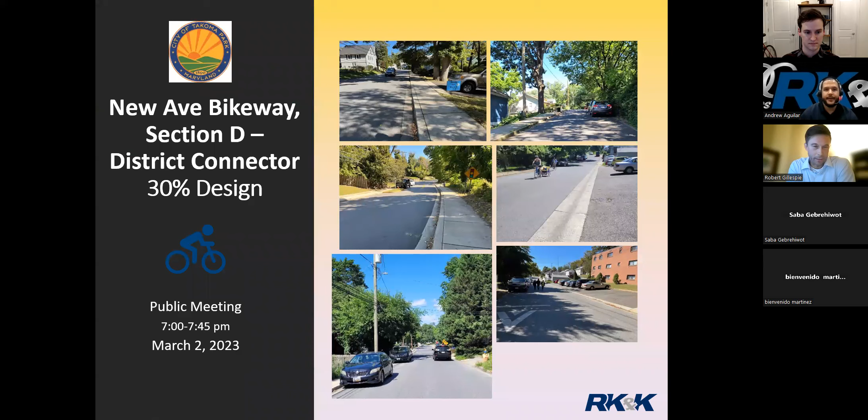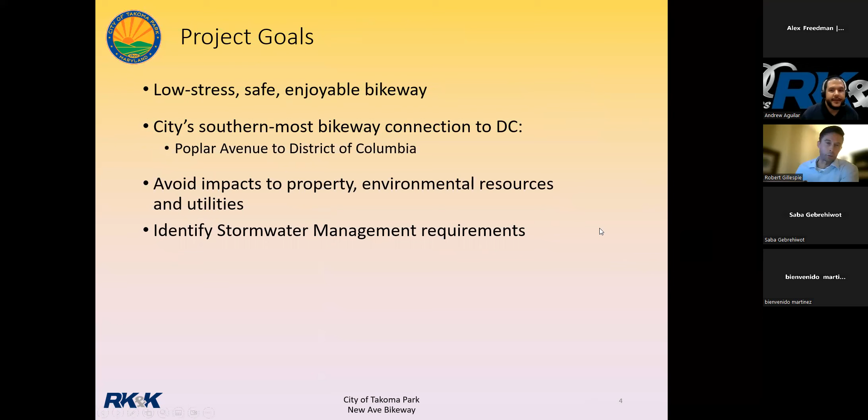So preliminary design, as Alex mentioned, is funded through an MWCOG Transportation Land Use Connections Grant. And the project goals are development of a low stress, safe and enjoyable bikeway. Section D would complete the city's southernmost bikeway connection to DC. It would implement the improvements while avoiding impacts to property, environmental resources, and utilities. We would also identify stormwater management requirements associated with the improvements.

Our 30% design approach is to utilize low-speed, low-volume neighborhood streets. And our key facility types for this section of the bikeway include sharrows or shared lanes with appropriate pavement markings and bike route and wayfinding signs. We're also proposing shared use path where city right-of-way is available.

So city planning and public works staff, along with RK&K, conducted site visits to evaluate two potential routes. And we selected a preferred route for survey and engineering, preliminary engineering. Project stakeholders include City of Takoma Park, the community, of course, Montgomery Planning, and utility owners.

As Alex had mentioned, as a frame of reference, the design team is completing construction documents for both the New Ave Bikeway sections A and B. That extends along the southbound side of New Hampshire Avenue from Holton Lane south to Poplar Avenue, about 1.2 miles for sections A and B. Tonight we're talking about section D, and those limits extend for approximately a half mile from Poplar Avenue to the DC line, where it connects to Kansas Avenue Northeast, where it would connect to existing on-street bike lanes into DC.

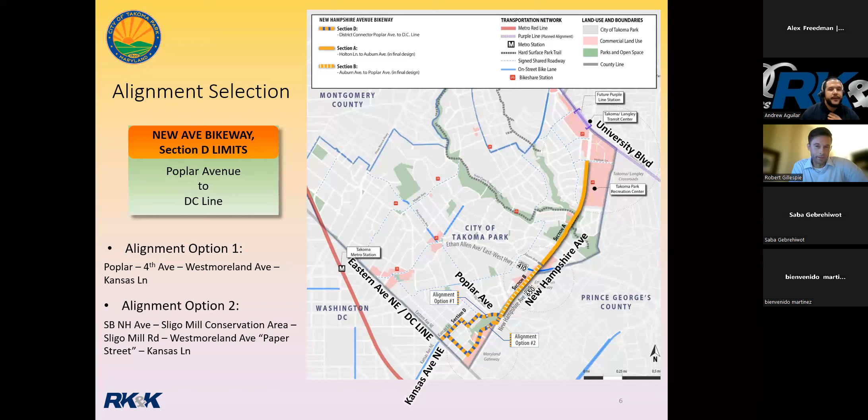Now, alignment 2 requires impacts to the Takoma Branch, Stream Valley, and the Sligo Mill Conservation Area. And it would also require narrowing of southbound Maryland 650 travel lanes just to implement an 8-foot wide shared use path with a 1 to 2 foot buffer for about 350 feet, which would require costly retaining walls and utility relocations. For these reasons, the design team selected alignment 1 for preliminary design.

The good news is we're not proposing any impacts to right-of-way or street parking on the draft plans for Section D. There are 2 utility pole impacts that we identified that would need to be relocated to install an effective shared use path - that's on Poplar Avenue and a wider sidewalk refuge for the school bus stop at the southwest corner of Westmoreland Avenue and Kansas Lane. We'll get into those details. I'm going to have Andrew drive us through the plans here shortly and spell those locations out.

To quickly summarize our steps completed and where we're headed: the design team performed field visits to review a selected preferred alignment for the preliminary design. A public informational field walk, Alex led that with the community last December. Comments were collected and considered for preparation of these 30% draft plans. We'll collect additional community comments received tonight and subsequent to this meeting for consideration in finalizing the 30% design. Our 30% design scope will conclude with a presentation to City Council in May.

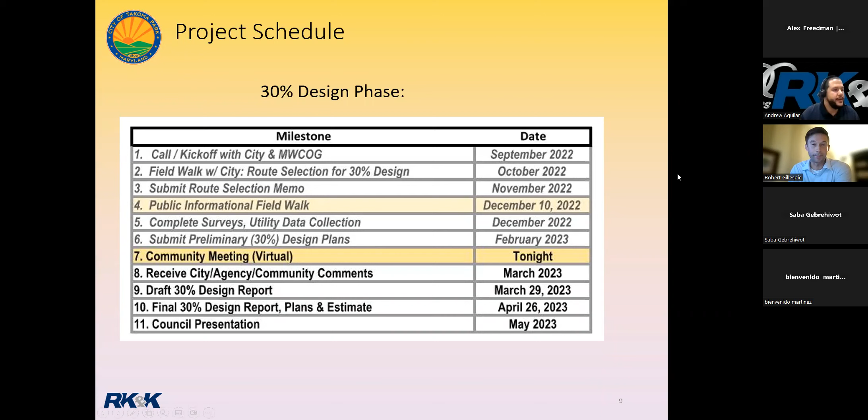To reiterate those next steps: we're going to collect comments from the community this evening, and subsequent to the meeting there'll be opportunities to provide your comments, as this will be recorded. Then we'll compile those, consider them with the city and other stakeholders, and we'll finalize the 30% design and conclude with a presentation to City Council.

Additional funding will also be pursued by the city to complete semi-final and final designs, which may include the MDOT Bikeways program, similar to what the city secured for sections A and B. So I'd like to turn it over now to Andrew to walk us through the 30% plans, and then we'll conclude with Q&A.

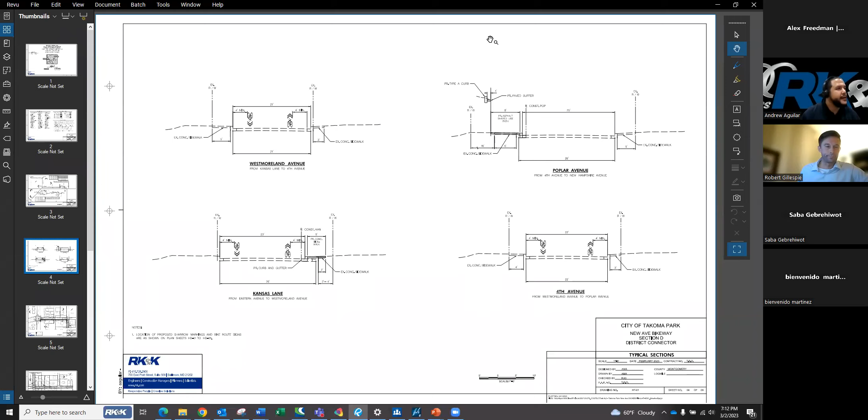Good evening, Takoma community. I'm excited to show you all the plans. I'll be focusing on showing everything in plan view and giving you an idea from block to block what improvements we're proposing. I'm going to start on the Eastern Avenue segment, Kansas Lane.

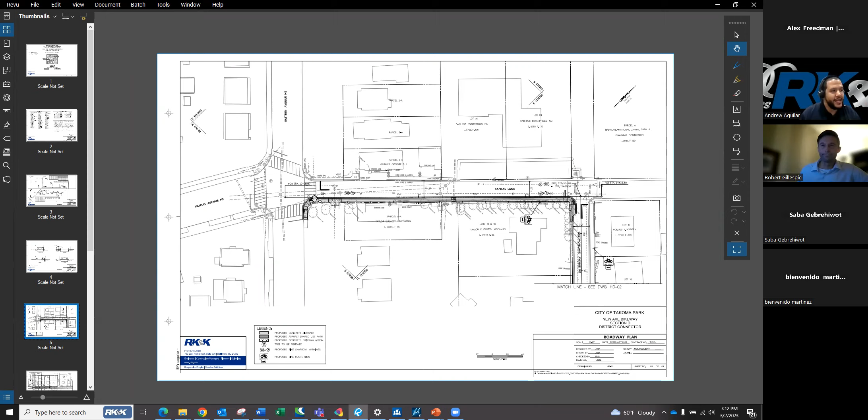The project starts at Eastern Avenue, and for the segment from Eastern Avenue to Westmoreland Avenue, we're proposing sharrows - this is a bike route, as Rob described earlier. This is a method used for bicycle facilities to show drivers that the road should be shared between bicyclists and drivers. So we're proposing sharrows along this segment of the corridor, and also through here we propose to improve the sidewalk.

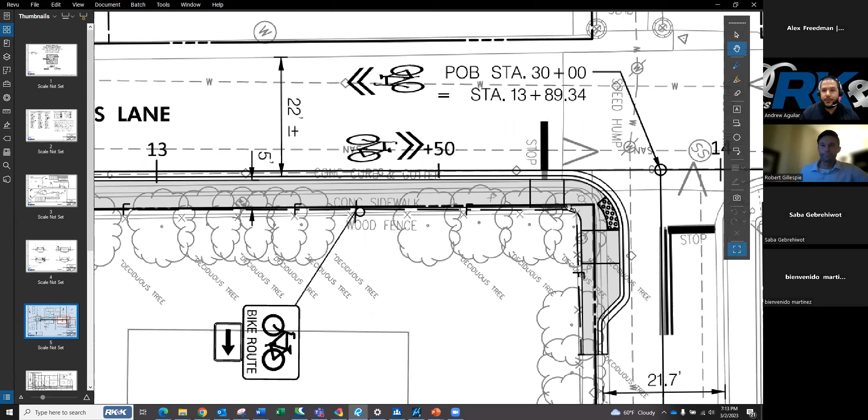From our field visits and research, we found that the sidewalk was only 2 feet. So we're proposing along this segment to put in a full 5-foot sidewalk. This is one of the utility impacts Rob was describing - we will need to relocate a utility pole at the corner to provide at least 3 feet of clearance.

From here, the alignment continues. We have bicycle signage and route signage to show bicyclists how to navigate through this corridor and understand when to turn. So the bicycle facility continues down Westmoreland Avenue. As I go through the sheets, I'm just continuing on the next sheet - it's a match line. For example, here it says HDO2, so from here I'll move to the next sheet and it'll line up right where this line is showing.

There's a total of 5 plan sheets. From Westmoreland Avenue, we continue to show sharrow markings and bicycle signage. Along 4th Avenue, we're proposing sharrow markings and bicycle signage, and we're also going to have some signage in between. So bicyclists, sometimes when you go a couple of blocks and you don't see any signage, we're going to add a couple of signs midway to let bicyclists know that they're still on the designated bicycle route. And then the project continues along 4th Avenue with the sharrow markings and bicycle signage.

When we get to Poplar Avenue, we're proposing a shared use path. One thing about this segment of the project is that we found that the curb lines weren't actually parallel. So we could actually fit in this 8-foot shared use path and rearrange this curb line and still maintain the same traffic pattern. So even though we're widening this curb a little bit, the traffic still operates as it does today.

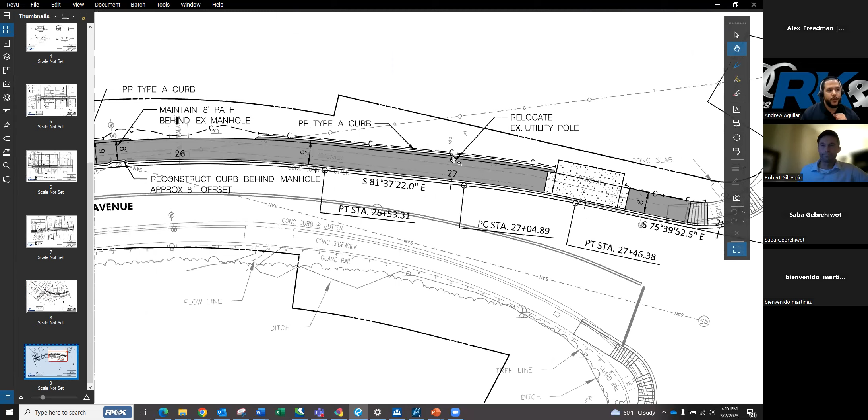We're proposing the shared use path from 4th Avenue, and then we'll continue along Poplar Avenue, past Good Avenue, and then the shared use path will continue to New Hampshire where it will terminate. This is where it will tie into the proposed improvements for the New Ave Section D bikeway, and this is where the other utility impact that Rob referred to in the presentation is, where we will need to relocate another utility pole. From there, I will hand it back over to Rob.

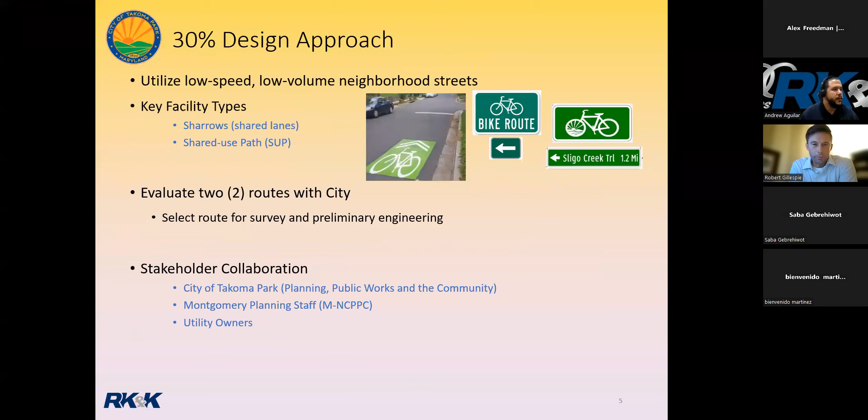No, there hasn't been a traffic study. I think the idea is that these are low volume, low speed residential streets. So we feel it's safer to use Sharrows along these stretches where we can't implement the shared use path.

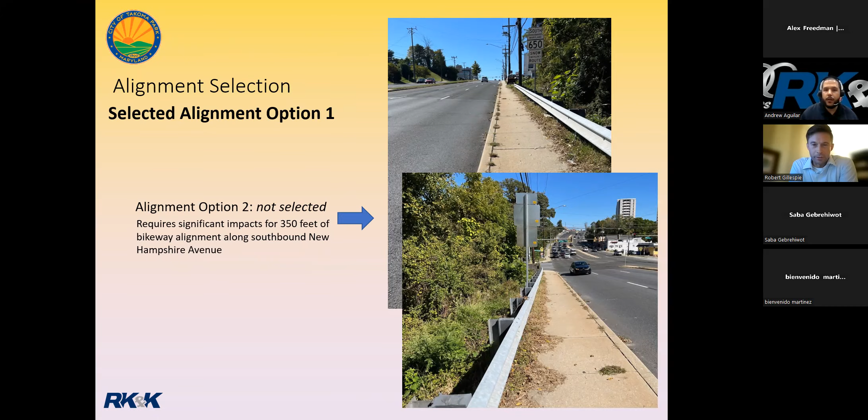In addition to that, I've asked our police department to do a traffic count and speed measurement at 3 sites along this route, just to have some point-in-time estimates. Those are underway right now.

That should give us at least a little bit of a snapshot. I think they leave out the traffic counter for like a week or 10 days at a time, so it gets a full range of hours and weekends. I haven't even told our consulting team that yet, but I'll provide it when we get the results back. It took a little longer than expected, so I was hoping to have it ready before tonight.

From Heather Hahn, we have a question or comment: Sharrows are better than nothing, but don't really help improve rider safety from drivers. I've been told to get off the road more than once while riding on a Sharrow marked road.

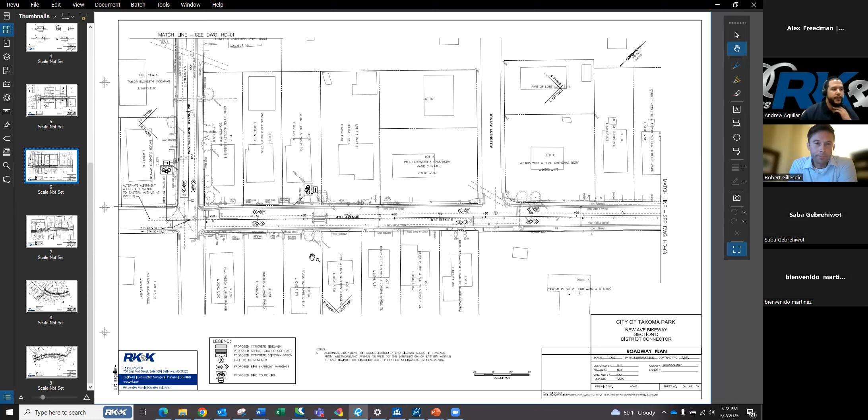Andrew, are we aware of any speed humps within the stretch along the alignment for alignment 1? Yes, there's a couple of speed humps. For example, here's one, and I believe at Kansas Avenue and Westmoreland, the entire intersection is a speed hump, and it's a raised intersection.

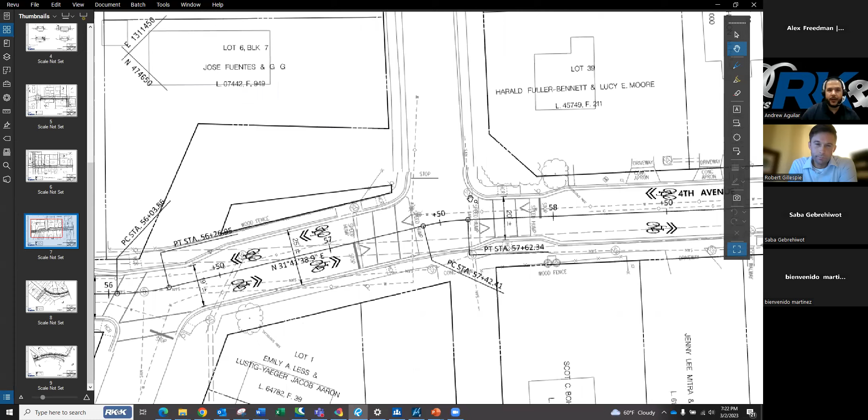Yep, raised intersection. And then there's a couple of speed humps throughout. There's a speed bump here at Orchard and 4th Avenue. Speed bump here at Cockerille Avenue and 4th Avenue on both sides. Speed bump here mid-block along 4th Avenue between Cockerille and Poplar. And those are the only speed bumps in the project limits.

But those are existing, those are not proposed with the Sharrows. Those are already existing speed humps. Good question, Sandra, thank you.

From Walter again: have you looked at the route at night? How well lit is the route?

So we haven't looked at it in the evening, we haven't been out for a site visit in the evening. But we can certainly work with the city and the community if lighting is desirable. I think, as you know, there are challenges with fitting lighting in the right of way. Sometimes residents don't want more lighting because of dark sky and other considerations.

So it's kind of a balance of lighting in the community and intersections, maybe just focusing more on intersections. But again, that can be discussed with the city and the community, and we can certainly accommodate supplemental lighting if needed and where needed.

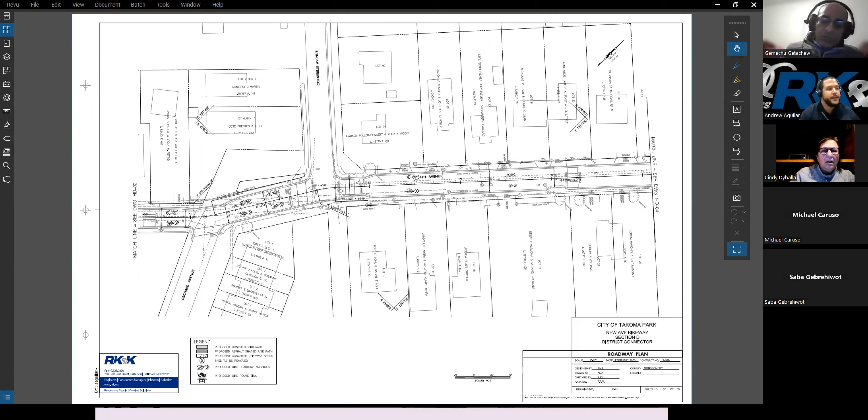I live along 4th Avenue. I like the idea of the sharrows. It's low impact and gets people through the neighborhood. It allows for bicyclists to have a general sense of direction and connect people from New Hampshire Avenue over to Kansas Avenue. I like some of the improvements proposed, especially at Kansas and Westmoreland, where there's a bus stop at that intersection. I like the idea of the dedicated pathway from New Hampshire over to Poplar, allowing for general use for both pedestrians and bicyclists. Is that true?

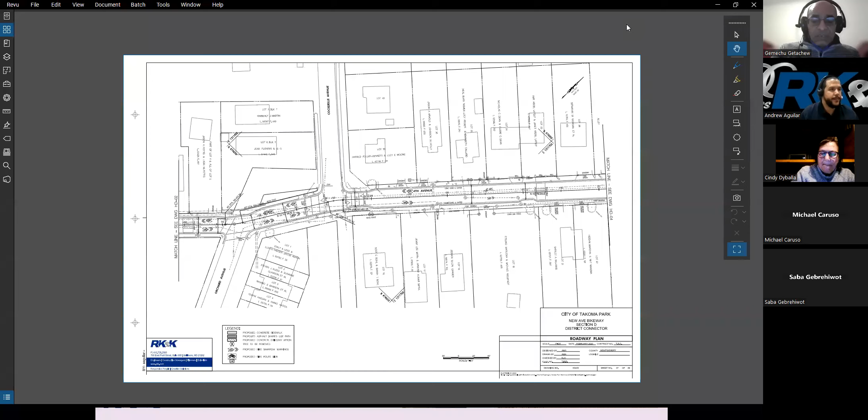Along Poplar Avenue? Yeah, the shared use path. That's correct. Okay, that's shared use path. Yeah, right, that's a great idea. Thank you for being thoughtful about that and allowing for that. Then at Poplar and 4th Avenue, that can be a little tricky for anyone entering that intersection, whether you're a pedestrian, motorist, or bicyclist, so I think this should help with that. I think Daryl Braithwaite and I identified a couple of places where street lights were out at that intersection, and that's now been resolved with Pepco.

So I think everything's pretty well lit at the intersections. We clearly have the newer version of streetlights in the area. And relocating that pole at Westmoreland and Kansas would be a great benefit because it clearly obstructs any pedestrian at that corner, so relocating is a great idea. And anything that can be done to help improve Kansas

and Eastern for pedestrians to walk. I use that to get to work when I walk every day to work, and anything that could help improve the corners there on the near side on Takoma Park would be helpful. There have been some improvements over the years, and I know Eastern is being rehabbed, but anything that can help out in general to make that any safer, I would appreciate that. So that's my general feedback.

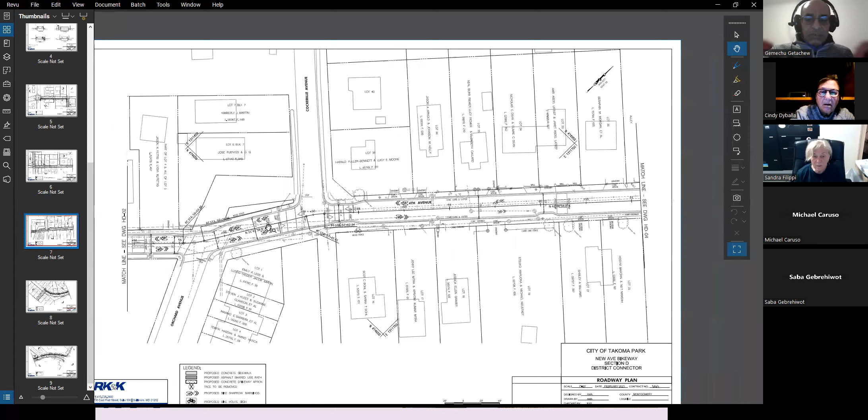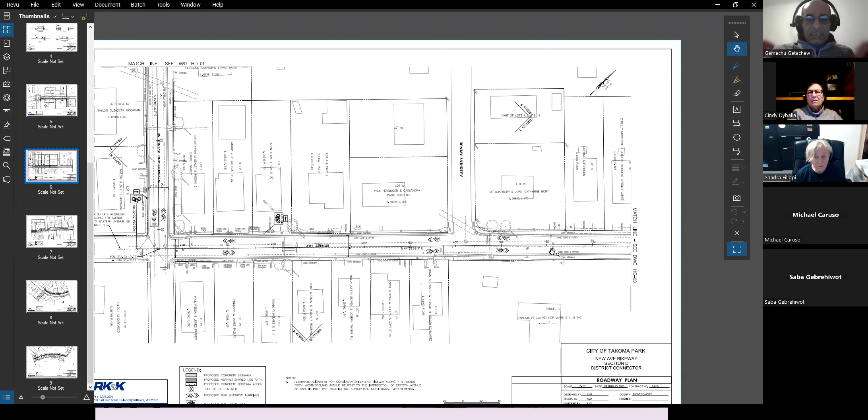Thank you, Paul. As Paul explained his point of view on the project, it's worth mentioning, Ashley, that for this segment of Fourth Avenue we did look into trying to put in a shared use path through here, but we tried different ways of setting it up and found we really couldn't get it to work without major impacts due to the limited right of way. I just wanted to come back to Ashley and mention that we did look into not using the sharrows and putting in the shared use path.

We found that the best we could do is that in some areas there was already a 5-foot sidewalk, and we were seeing that maybe we could gain a foot. So that's why we went with the sharrows through the Fourth Avenue segment.

Yeah, thanks Andrew. I think also if we had eliminated street parking continuously, we would certainly be able to fit a continuous shared use path. I think that's the challenge. I don't think that would be well received by the community to completely eliminate street parking along one side or the other. I think you could look at eliminating some sporadically, but that's not going to solve your continuous shared use path connection through this stretch.

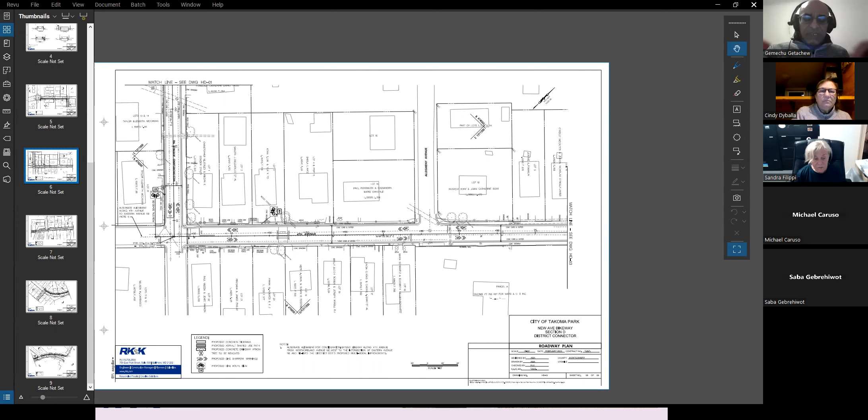Thank you guys for addressing that. Also, Sandra asked a question in the chat about the paving of the shared use path portion. What's that looking like? How is that going to be changed from what's currently there?

So for the rest of the New Ave Bikeway sections A and B, we're proposing an asphalt shared use path along there, so right now we're proposing the same—asphalt for the path itself. Any driveway aprons or pedestrian ramps at the intersections would be concrete, just to make sure we can achieve ADA compliance. That's consistent with New Ave Bikeway sections A and B, and also what MSHA and other county municipalities in Maryland do to ensure ADA compliance at those locations. It's not to say we can't do concrete, but we're going with consistency with what we're doing elsewhere for the bikeway shared use path.

So, thanks Rob. For this section along Poplar Avenue, for those new to reading diagrams, it sort of shows that the curb line moves out into the roadway a little bit. Can you speak to how much extra roadway space is being taken along here, Andrew, to accommodate that?

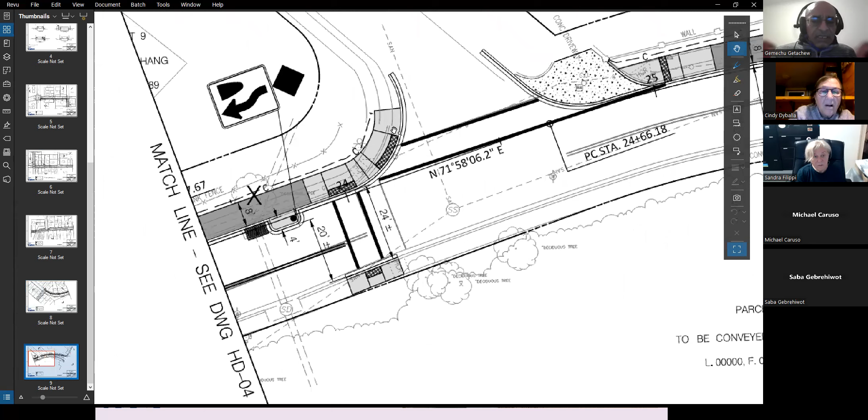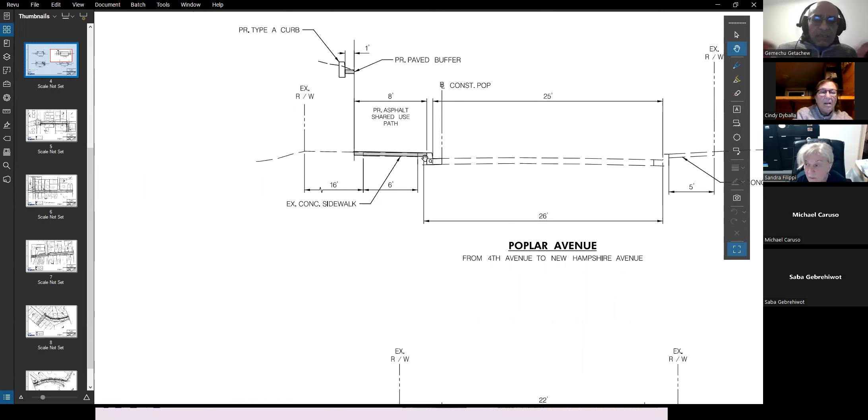Yeah, let me explain what's going on with this curb line. Typically when you have a roadway, the two curb lines are parallel. Let me float over to this sheet to show you what I mean. If you look from the intersection, the curb line matches up pretty well—we're probably about a foot over—but over here these curb lines aren't parallel. So it does go a little bit farther out, and we have the dimensions. As far as how much we're taking, typically along Poplar we're only taking about a foot. The existing width from curb to curb is 26 feet. You can't quite see it, but this is an existing curb line shown with this dashed line—that's just the way it prints. This is an existing curb line, and that's the back of that existing curb right here, and we're moving that out about a foot typically along Poplar.

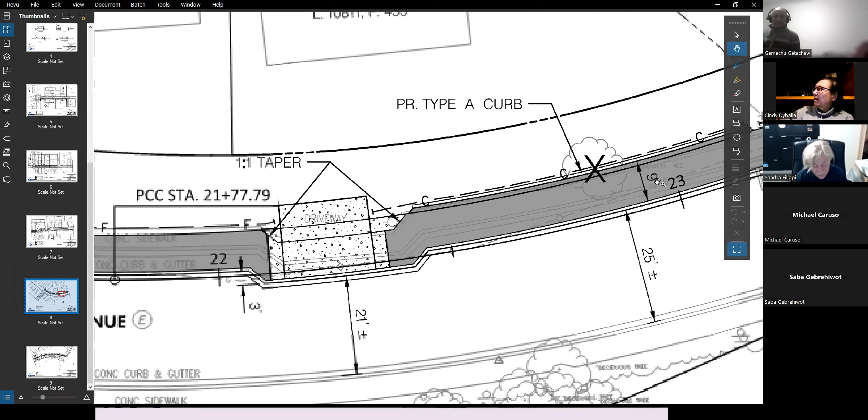Okay, thank you. So the 6 is not accurate then. It's going to be an 8-foot wide path minimum throughout. This isn't a 6, this is a 9. It's 9 feet. Oh, that's a 9. Thank you, yeah, that's what I was explaining. Yep, thank you.

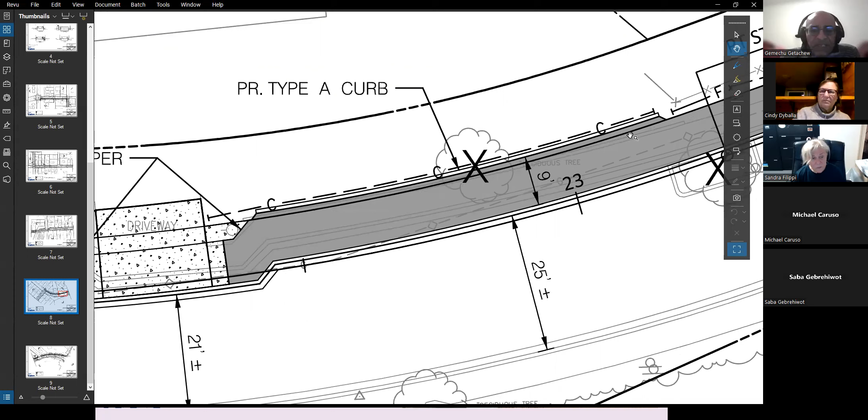But the reason why it's 9 right there is that we have this proposed type A curb along the back, and this already exists. There's already a coping right here. We're just replacing it. If you can kind of see this line here, that's a coping. So with the realignment, we're just putting that coping back in, and we have a 1-foot shy line from the 8-foot path for bicyclists' pedals when they're riding up against that curb. We left a 1-foot shy line for that.

Okay, so the curb you're talking about, Andrew, you're calling it a coping curb. That's just to make sure we don't chase the curb, cut it in the slope, right? We're just trying to bridge the gap. Yep, exactly. Okay, limit that cut line.

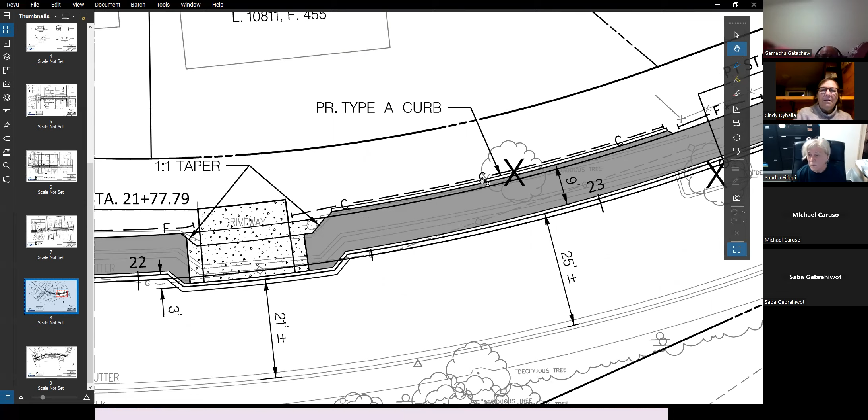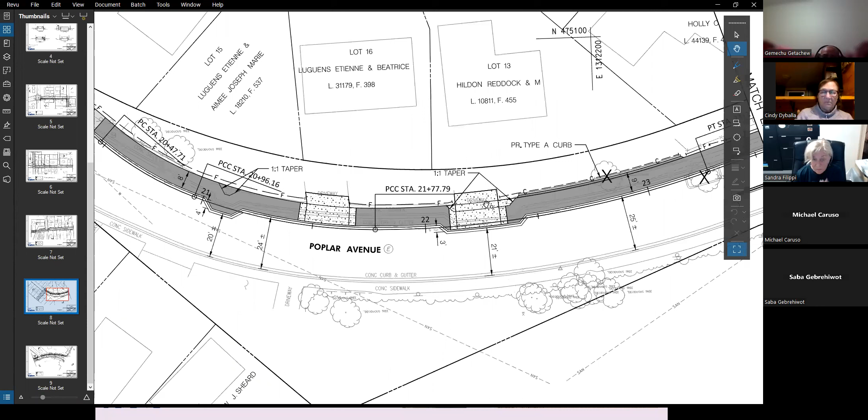Thank you. So is there not enough right of way to have a 10-foot path continuously? Because the guidelines for shared use paths by the National Association of City Transportation Officials really recommend 12, honestly, but 10 in tight spaces. So this is kind of what we ran into, because I was working through this, and we tried a couple of different things. We tried a 10-foot path, initially with a 2-foot buffer with the 8-foot path.

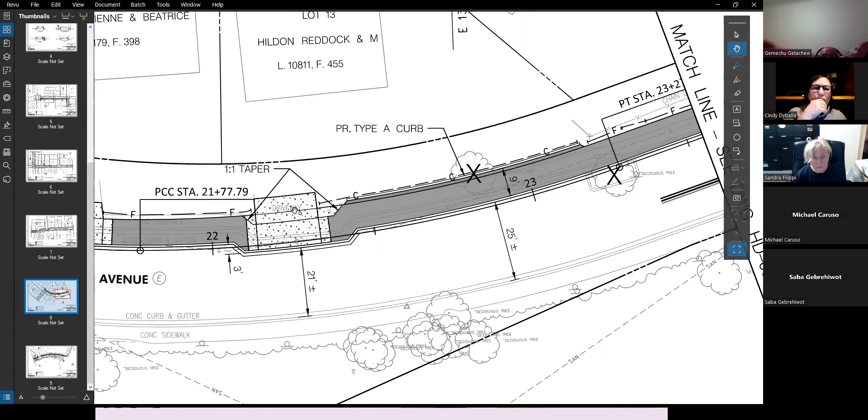Now, if you look at the reason why we're able to make this work, it's because our shared use path is kind of falling right where that existing back of sidewalk is. As soon as we move past that, the limit of where we're cutting into these people's yards and fence lines started to go out pretty significantly. We just didn't think that was a fair trade-off for what we were gaining, so we went forward with the 8-foot path.

Also, if we do go with the 10-foot path, especially near this segment, there's a lot of utilities back here, like the utility pole and water valves. That was part of the reason why we went with the 8-foot path, because even with this one, with this wall, if we were to try to put a 10-foot shared use path, there's this wall floating back here. That was another example where we really start cutting significantly into these properties, and we just didn't feel it was an even trade-off for what we were gaining.

Thank you for the explanation. I do see 24 feet of right of way in the roadway, which is a pretty sizable amount of space for the cars. Why not push the trail further into the roadway?

Yeah, in DC a lot of roadways now, the recommended width is 10 to 11 feet max, depending on space availability. So I'd recommend, Alex, that you guys consider revising this and pushing the trail out to get a 10-foot trail, so it provides ample space for cyclists to not have a conflict zone with people using the shared use path to jog or walk.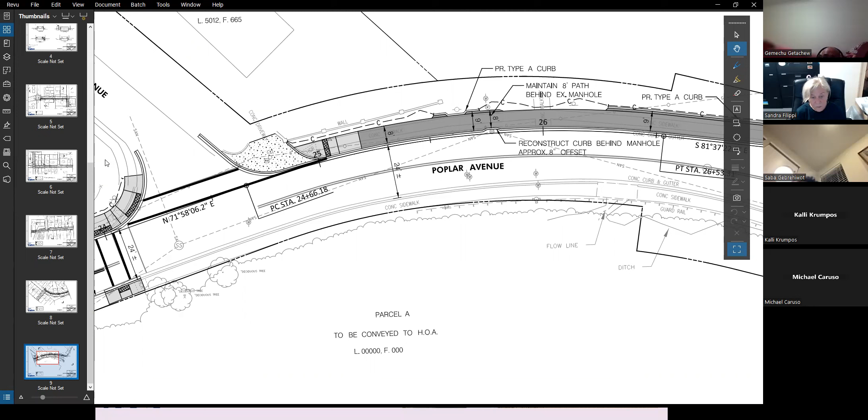Anyone with follow-up questions, feel free to email me — I'll drop my information in the chat so you can access it, and I'll relay it to our team or follow up with you directly. In the chat, someone asked: is there currently or will there be a button-controlled crossing at Eastern Avenue from Kansas Lane to Kansas Avenue? And likewise, will there be a button-controlled crossing for New Hampshire Avenue at Poplar/Ray?

So Eastern and Kansas, I believe that's District DOT jurisdiction, so I won't speak for the city, but I think that's something for District DOT. My understanding is they're working on plans to upgrade Eastern Avenue with streetscape and multimodal improvements, so I imagine they'd address that with those improvements, but I'd defer to Alex and Daryl if they have any other insight.

That's correct to the best of my knowledge. DDOT is planning a full Eastern Avenue revamp — I believe it's in their FY26 capital budget. We're following along, and once it gets moving a little faster, since the designs are complete, they'll just need to build it.

Then the final word will go to our last hand raised, Cindy. Thank you — didn't mean it to be that way.

A couple of thoughts on the Poplar Avenue stretch. I think you said you were going to consult with the police chief about some of the traffic. You might find that Poplar isn't as busy as you might think compared to some of the other access points to New Hampshire Avenue. I don't know that for a fact, but he would know how to answer whether you really need the full width, given the traffic load on that road.

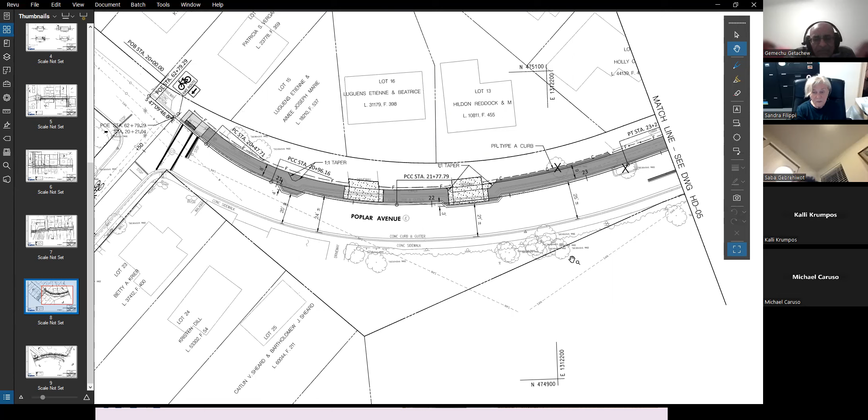And the other thing, in looking for future sources of funding, just keep in mind, Alex, whether there's some minimum below which organizations don't want to fund it because it's too skinny. I don't know if that's an issue, but I want to flag it so you all can consider it — we don't want to design something we then can't get funded.

I love this, and I think it's going to be a real asset. Thank you, Cindy.

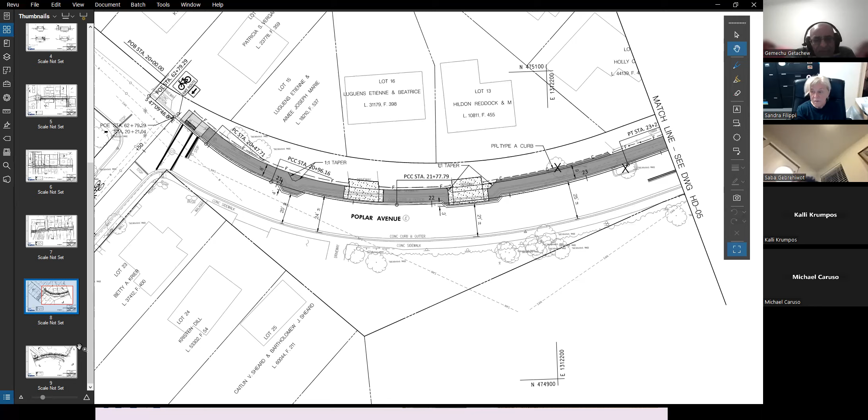Hey Alex, I don't think we answered the other question about Ray Road. Oh, I'm sorry, you're so right. So to clarify, the question was about Poplar and 650 and push buttons — we are proposing some signal modifications, including push buttons at that intersection, as part of the New Hampshire Avenue Section B improvement project, so that should be addressed.

I believe that should be addressed with that improvement — we're just extending essentially that sidewalk there. And I think Andrew's shown it in our plans, the proposed improvement at that northwest corner, now showing it in gray — this is the proposed work. Let me know if that answers your question.

Just two comments in the chat before we move on. From Ashley: especially since there isn't parking on the street, it seems like we could easily gain some space for a shared path from the roadway. Thank you, Tony, for bringing that up. And from Paul: there's lots of off-street parking on Poplar and New Hampshire, and lots of cut-through traffic there to Kansas.

Ours, while trailblazing as one of the first pieces of the Metropolitan Branch Trail, which eventually will connect from Union Station all the way up to Silver Spring, hasn't been significantly modified since then. So it's now becoming one of the weakest links, and we're interested in keeping it up with the times and bringing it to the new standards we have in bike path technology.

So I'll pass it over to Rob and Andrew to take us into what they're thinking. Thanks, Alex. Just for everyone's benefit joining us, I'll go back through introductions. Good evening everyone, Rob Gillespie with RK&K, consultant project manager. I'll be presenting this evening with my lead engineer, Andrew Aguilar. This is for the City of Takoma Park's draft 30% design of the Metropolitan Branch Trail Upgrades project.

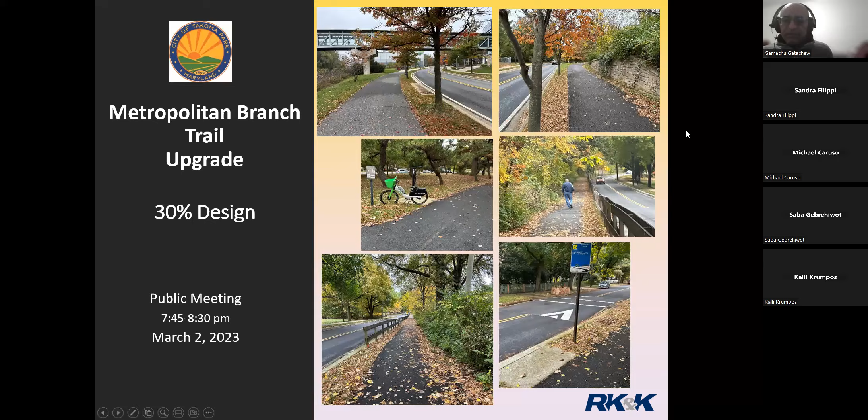As Alex mentioned, the 30% design is funded through an MWCOG Transportation Land Use Connections grant. The project limits are about a half mile, the City of Takoma Park's maintained section of the Met Branch Trail, running adjacent to the west side of Takoma Avenue and Fenton Street from the DC line to just south of the New York Avenue intersection, to the north just outside of Silver Spring. Most of this trail segment runs parallel to WMATA's Metro Red Line as well.

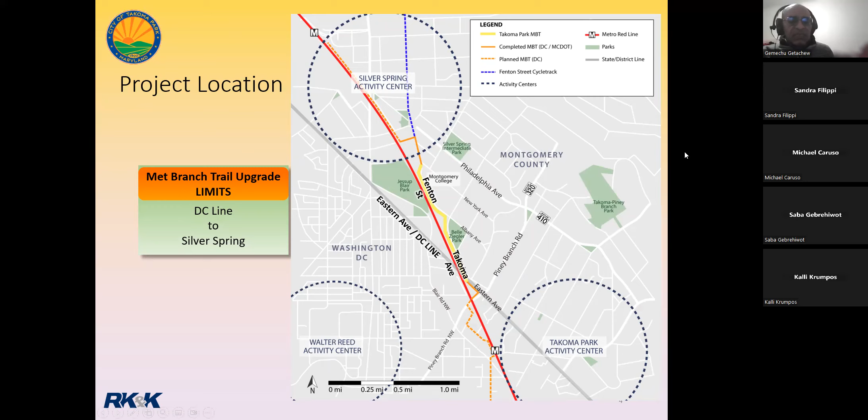Project goals for the trail upgrades: upgrade that half-mile section, improve safety and comfort for pedestrians and cyclists that use the trail. We want to minimize tree impacts while doing so, and implement trail improvements while avoiding impacts to property and utilities. We'll also identify stormwater management requirements and opportunities for stormwater management treatment within the project limits.

The design team collaborated with project stakeholders, including city planning, city public works, city maintenance, and the public, WMATA, Montgomery Ride-On, and Montgomery College, to develop our draft 30% plans.

Our 30% design approach is to reconstruct the existing trail essentially on the same alignment with enhancements that focus on user safety, sustainability, and maintaining tree canopy. That includes a 10-foot wide typical section for the path, maintaining buffer separation between the trail and roadway, and using sustainable, flexible porous paving, similar to what DDOT just did at the southern limit.

We're also looking at raising the trail elevation about 3 inches to reduce heaving from tree roots and save trees, which will also help reduce city maintenance requirements. We want to avoid impacts to utilities and right of way, including WMATA's Metro Red Line, their existing fence, and retaining walls. We want to install continuous lighting for the trail, including at intersections, and we're proposing ADA compliance upgrades for pedestrian ramps and bus stops.

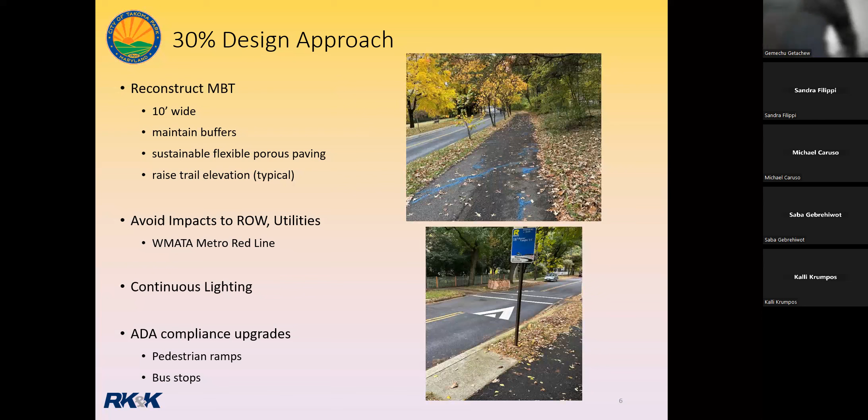So we also propose to improve safety and connectivity to the trail, sidewalk network, and to Belle Ziegler Park at the Takoma Avenue and Buffalo Ave intersection.

We'd also relocate the two bus stops for northbound and southbound closer to the intersection, basically right at the intersection. And we would assess installation of stop signs to create an all-way stop-controlled condition.

The good news is that we are not proposing any impacts to right of way, utilities, or street parking for these trail upgrades. Tree impacts will need to be fully assessed during the next phase of design because we're going to need to complete a thorough inventory and condition assessment of all trees.

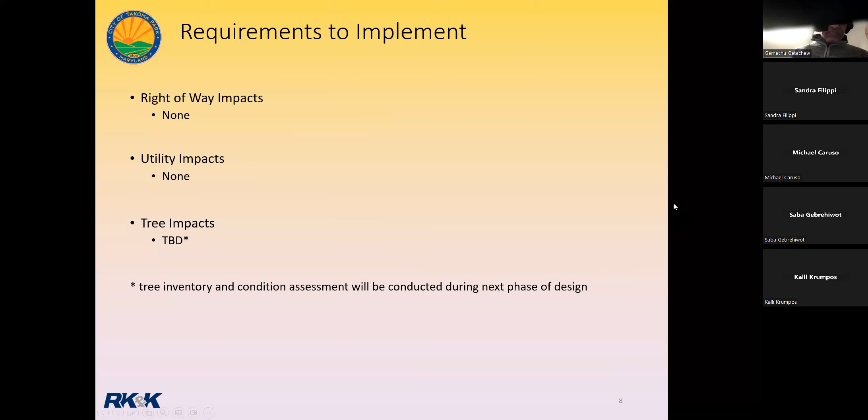We'll work with the city arborist as well to assess those impacts. But as I mentioned earlier, raising that profile 3 inches for the trail and using a flexible material will help to minimize those tree impacts.

Additional considerations for the trail include installing bike racks, benches, wayfinding signage, and lighting consistent with the city's streetscape manual.

So to summarize our steps that we've completed and where we're headed: the design team performed a field visit with agency stakeholders to review project constraints and concerns. Alex led a public informational meeting and field walk back in December. Comments were collected and considered for preparation of these draft plans.

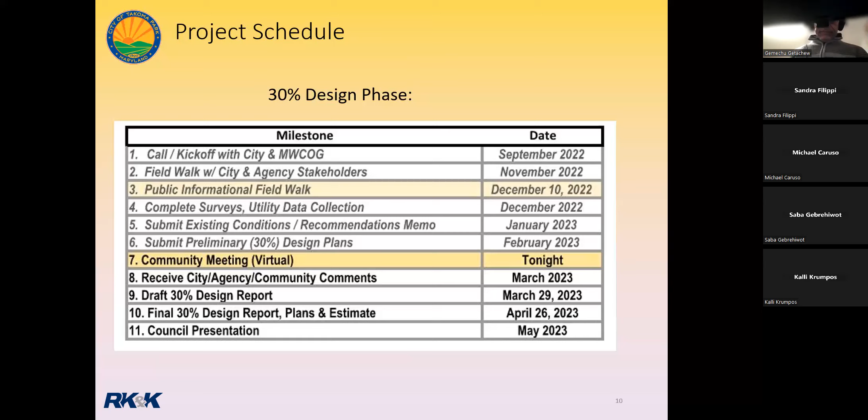We'll collect additional community comments received tonight and subsequent to this meeting for consideration in finalizing those 30% design plans. Our 30% design scope will conclude with a presentation to City Council in May, and that wraps up our scope for this project.

So again, those next steps are right here: collect community comments this evening. Appreciate your feedback and comments in advance, and we'll finalize the 30% design and conclude with a presentation to City Council. Additional funding will be pursued by the city, most likely through cost sharing, to complete semi-final and final designs.

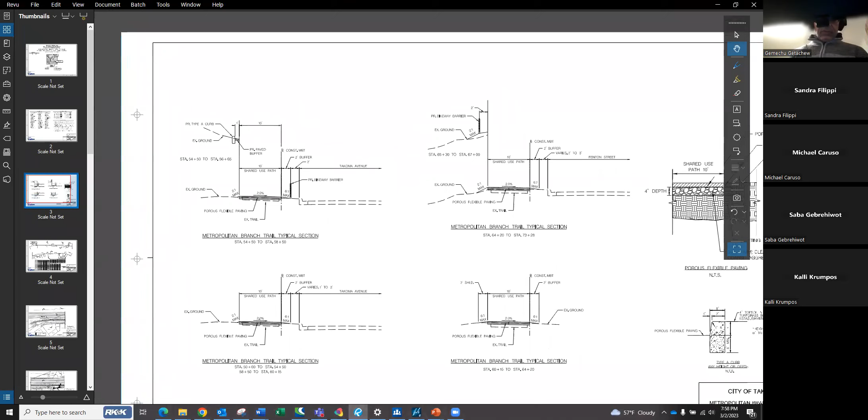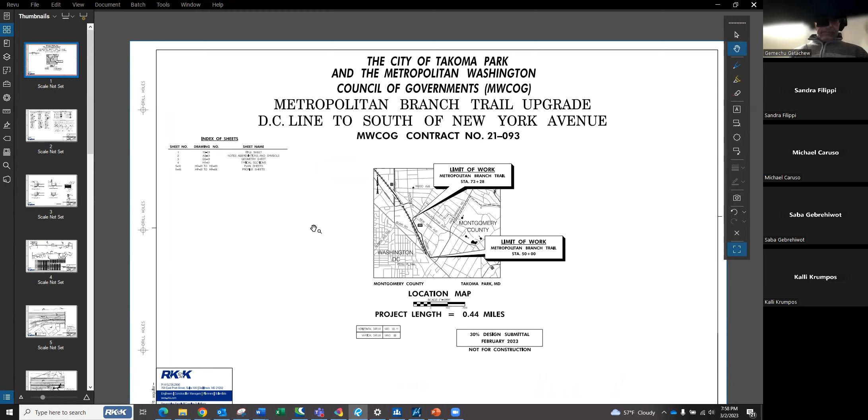Good evening, everybody. Once again, my name is Andrew Aguilar, for those who weren't already on the call, and I'll be presenting the improvements in plan view for the project. I look forward to sharing these with everyone. Once I'm done going through the plan sheets, we're going to open the floor for questions.

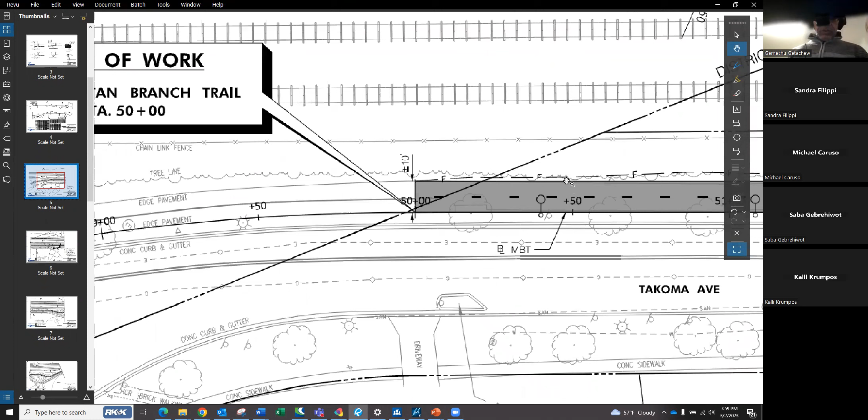So the project begins at the District of Columbia, Maryland right-of-way line. This doesn't quite show it perfectly, but what we're doing is the existing flexible paving here, we're going to just meet that joint and continue the flexible paving throughout the project. As Rob mentioned, one of the goals with this project was maintaining that existing horizontal alignment.

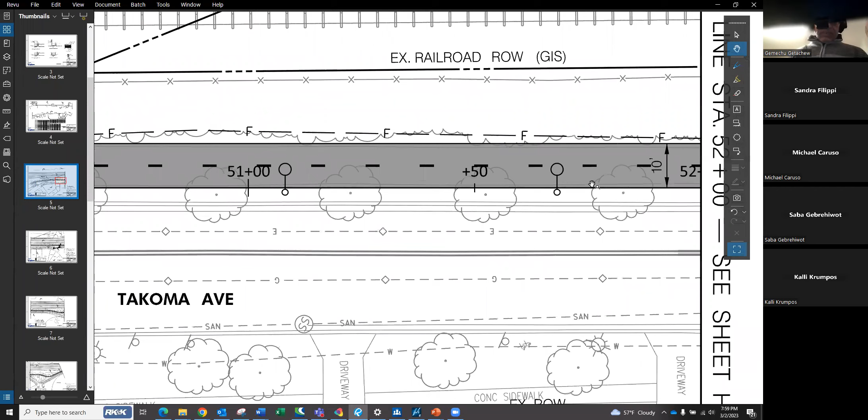What we did was that front edge of the shared use path, as you can kind of see, there's a gray line in the back. It's not going to be perfect because it's survey, but we're pretty much following that front of the shared use path and holding that line to limit the impacts to these streetscape trees.

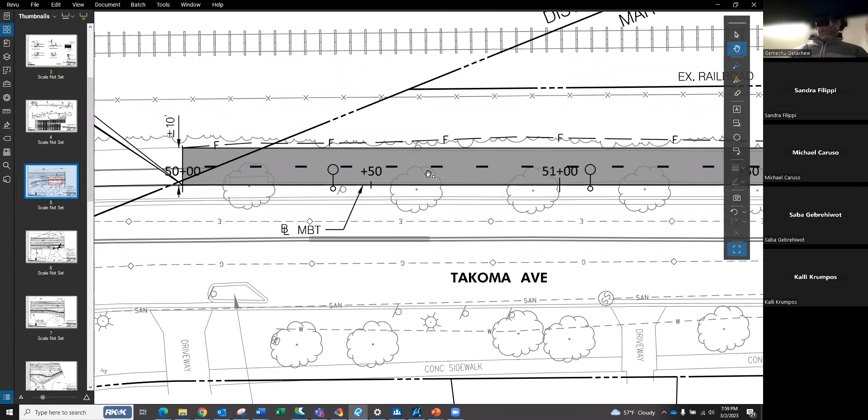So by combining holding that line, using that rubber sidewalk porous material, which is good for the trees, and then the big fix with the tree root heaving: by raising that profile, you can't see this in plan view, but throughout the project we're raising that profile 3 inches to help alleviate the tree heaving issue we're running into, that we observe in the project.

I'll just start to work my way north through the sheets. It's a total of 6 sheets, and I'm just going to walk through the project for everybody. The entire limits of the project is a 10-foot shared use path. However, the existing conditions isn't 10 feet throughout, so that's one of the improvements we're trying to incorporate.

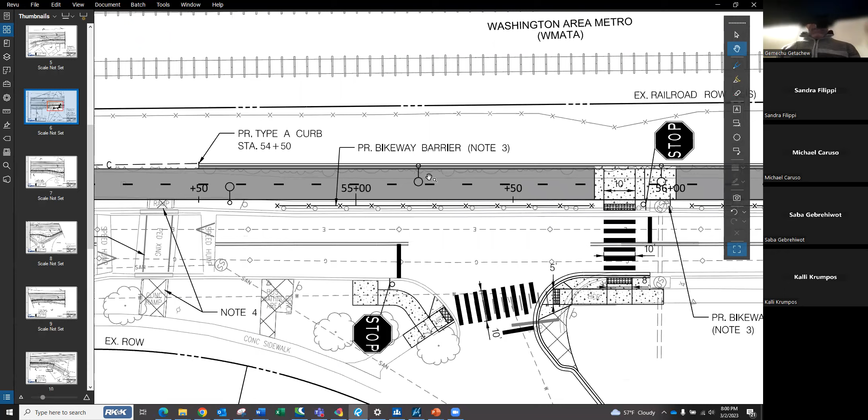For example, this segment here where the railing is, you can see the path is narrower than 10 feet. This is the existing bike path right here. You can kind of see it. It's within that 10-foot line, and that's one of the main improvements.

And here goes the Buffalo Avenue intersection improvement. When we spoke to the city, they discussed that for the Belle Ziegler Park, they wanted to have a more direct access route, so they wanted to move this crossing from here to the intersection.

As Rob also said, we're going to make this a stop controlled intersection. And the bus stops located here and near this crossing, we're going to move the bus stop to this side, adjacent to the ramp for the crossing. This is the location of the other bus stop.

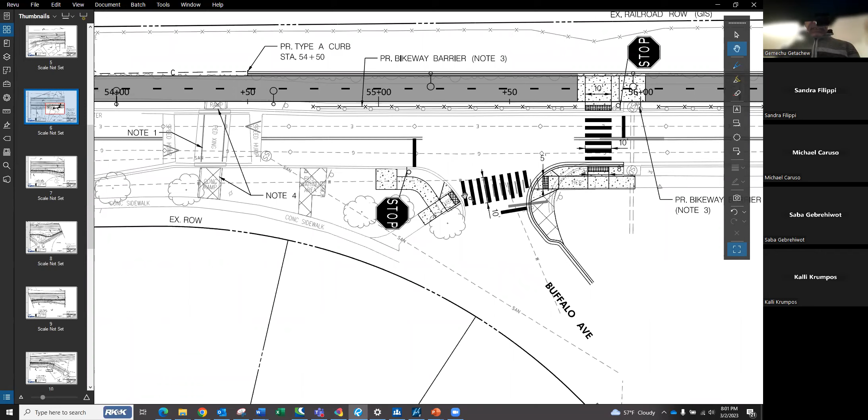We also are proposing lighting throughout the project, typically at 60-foot spacing. So these circles you see here throughout the limits are proposed lights that we're going to have along the trail. Another benefit of this improvement that the city wanted for Buffalo Avenue is this bump out, to make this a shorter crossing as well.

And then working our way to the other end of the project, the project continues and follows the same alignment where it has the typical 10-foot width, and we're holding that 10-foot path throughout.

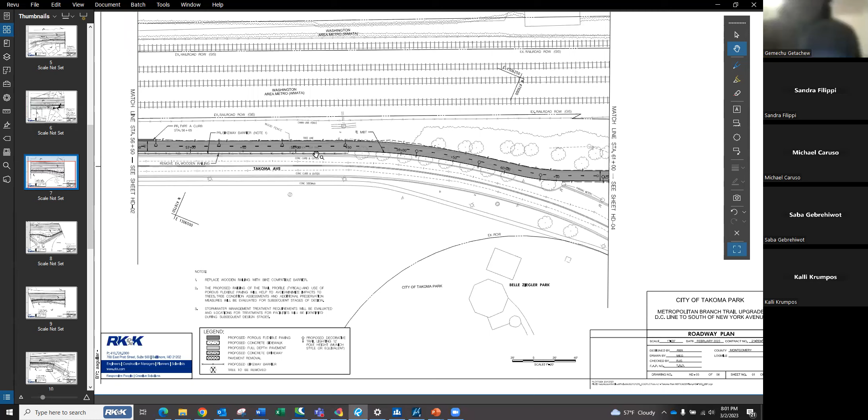Just to bring to your attention again, the main improvement here that you can't really see in the plan view is that we raised the profile by 3 inches to alleviate the tree heaving. So you can't see it, but we have a proposed profile that is helping with that issue.

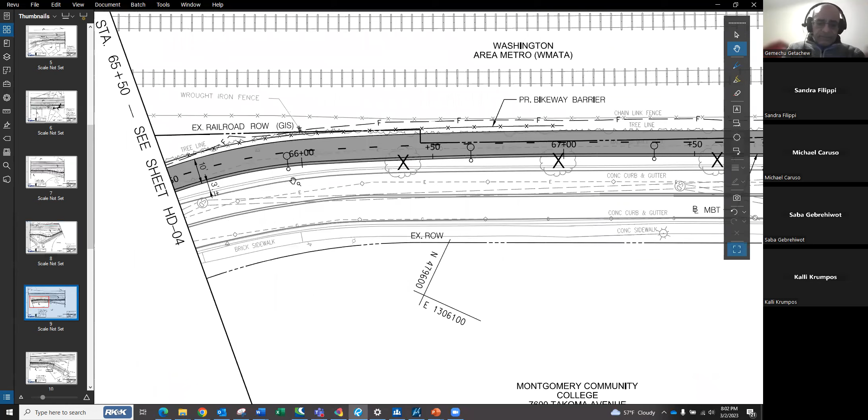Working our way through the project, we continue to hold that 10-foot path. This area is the first part where we had to taper the path by 1 foot towards the roadway. It's still a 10-foot path, but the reason we tapered it is that this fill line, this fill we would have had to do on the other side of the trail—by coming in 1 foot, we were able to avoid impacting this fence and having major impacts by pulling this in by 1 foot.

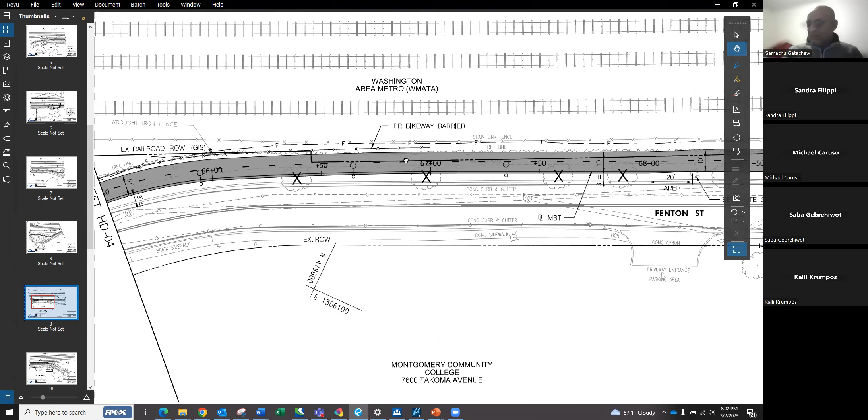Once we get past this concrete apron, there's another taper and the trail follows the existing alignment again, continuing throughout at 10 feet wide. It continues to go, and the path terminates at the existing concrete bike rack pad.

With that being said, I'm going to go ahead and open the floor for questions.

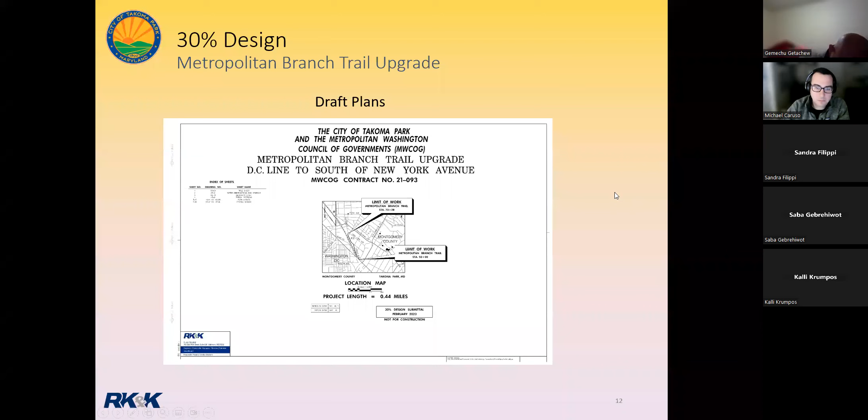Thank you, Andrew. A couple of questions came into the chat while you were presenting. The first was just a comment: it may be worth mentioning that this section has heavier than normal pedestrian usage from commuters to the Takoma Park Silver Spring campus from the Takoma Park Metro Station, which is a good point, Mark.

And Sandra also comments, then adds a question: I was working at Montgomery College at the time of design and installation of this MBT segment. There were many contentious meetings with neighbors about the materials recommended for the trail, fencing, etc. Do you anticipate similar pushback for this upgrade project?

I can tackle that one. That's a great question, Sandra. I have been preparing myself for that, knowing and hearing stories about how contentious the early path development was. To date, I have not received any commentary from neighbors immediately adjacent to the path.

For this meeting, as I did also for the district connector new bikeway section, I flyered every house in the neighborhood, door to door, letting people know this meeting was happening, with contact information and follow-up options, and I haven't heard anything back yet.

In addition to our digital outreach, my suspicion is that because the trail is already here and we're not dramatically changing the footprint, people are now used to it as a really great public amenity, and to fight a refurbishment of it maybe doesn't feel quite as high stakes — that's my guess.

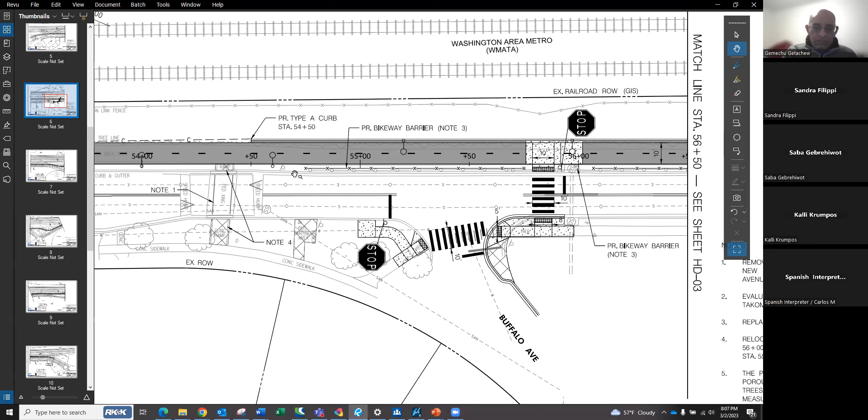You also just sort of answered the question. I didn't even know there was a current southbound bus stop there. I was under the impression you were moving a bus stop from the north side of the road to the trail side, but it sounds like you're just moving an existing one to a better location.

Correct, Tony. The survey didn't quite pick up the line, but there's a small pad right here between the trail and the back of curb, next to this sign, and that's the one we're going to be moving over next to the ramp.

Okay, great. Also, one other question - if I heard you correctly, there's a proposed stop sign here at that particular spot.

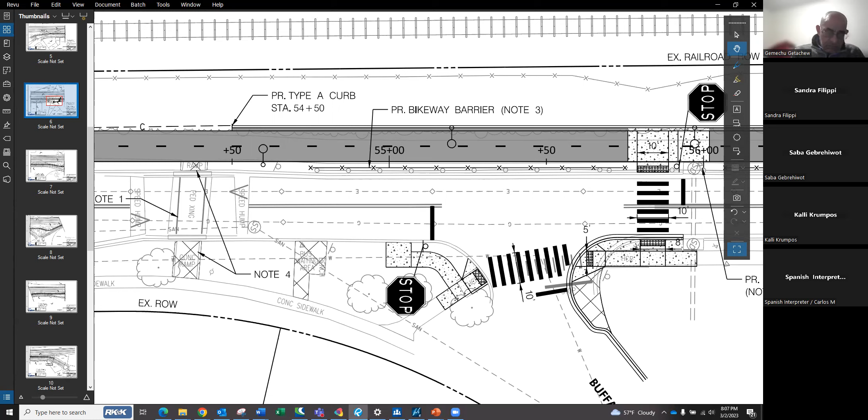Yeah, we're proposing stop control for both the northbound and southbound directions along Takoma Avenue. That's subject to warrants - sight distance might be a justifiable reason to put the stop signs there, but right now we'd have to look at that and talk to the city. We did similar installations of new stop signs along Flower Avenue too for those same reasons.

Yeah, for if you guys are thinking of a stop sign, I would say, Alex, give this some thought, because it's getting harder and harder to leave Takoma Park these days. Every single road in and out is littered with stop signs, and if this is a very low volume bus stop to begin with, it begs the question why put a stop sign here if it's not a place where pedestrians are regularly crossing, or we have a traffic issue. I know we just got new stop signs at the intersection of Ethan Allen and Elm and Carroll and Lincoln, and those have justifiable thoughts behind why we needed that. But at this particular spot, I question the need to add another. This is a very heavily traveled road. If you haven't done a traffic count, I'm pretty confident you'd find traffic counts higher than you'd anticipate, because everyone has to go this way to get to Silver Spring, and lots of us go to Silver Spring.

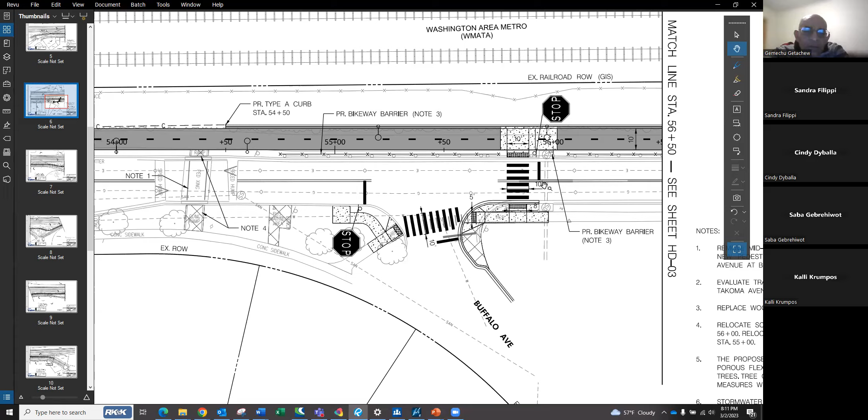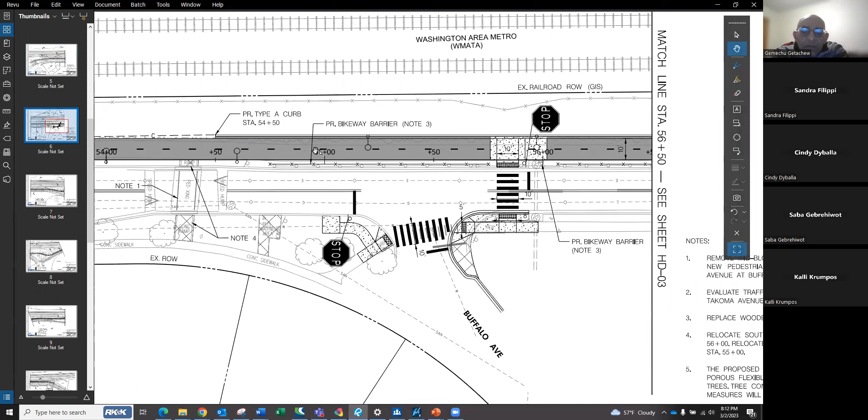So to summarize that question, typically the trail is 10 feet. What we found was that near this southern limit, it's 10 feet, right? As you approach this existing wooden railing, you can see in the field, it narrows. You can kind of see this gray line.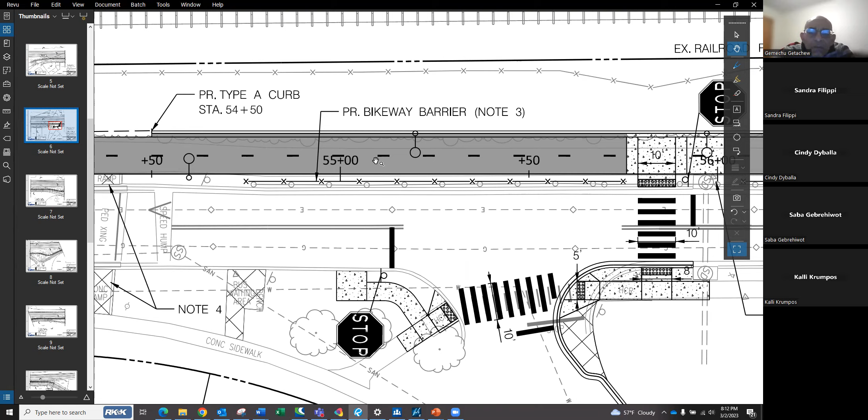That's where the existing shared use path is, and we're proposing a type A curb to limit us going into this slope, because with the contours, they narrowed it like this - I think they didn't want to chase this slope.

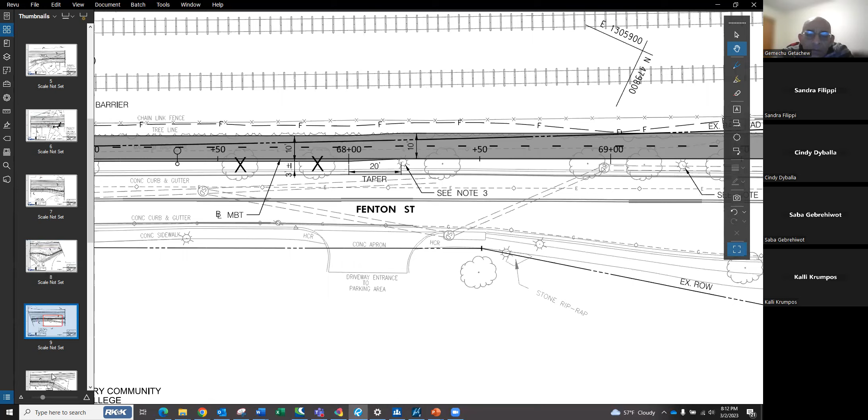With this 8-inch curb that we're putting in here, we can put in a 10-foot shared use path, limiting cutting into that slope. Once you get north of that segment with the wooden railing, it does start to be 10 feet, 10 feet from there, pretty much 10 feet, 9.5 to 10 feet. There's another small segment where we measured just a little less than 10 feet, but once you start approaching Silver Spring again, all of this is 10 feet.

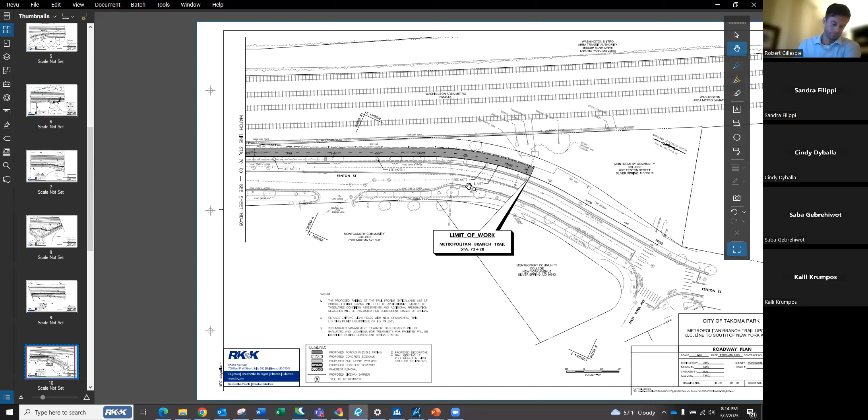So that would be my one request. My other comment - Andrew, if you go south a little bit, there's one hook in the trail, and maybe one more. Is this the area you're looking at?

Yeah, there's quite a bit of elevation change between the path and the road, so I don't know if it's feasible for the city to consider a fence or some way to buffer that drop off. Yeah, we saw that too, in the field, and we also looked at the survey and took a closer look at it, and it did look really steep.

It did. However, we've checked the standards for this slope here, and it checks out. We looked at where a railing was warranted. I didn't mention this, but for example, on this side of the path, you can see there's an existing fence - do you see this gray X?

There's an existing railing. For example, here, this is an example of where the existing fence stops, but we're proposing the railing beyond that, because if there's a certain height of drop off, it warrants that railing.

So we did do an analysis of that throughout, and surprisingly, I was surprised myself - as we refine the design more, I may even check it twice - but this did not warrant a railing, as steep as it seems, because I've seen it in person too, but it did not warrant the railing. So we'll take a second, verify, triple check, and make sure that's the case, but this first iteration, it didn't warrant it.

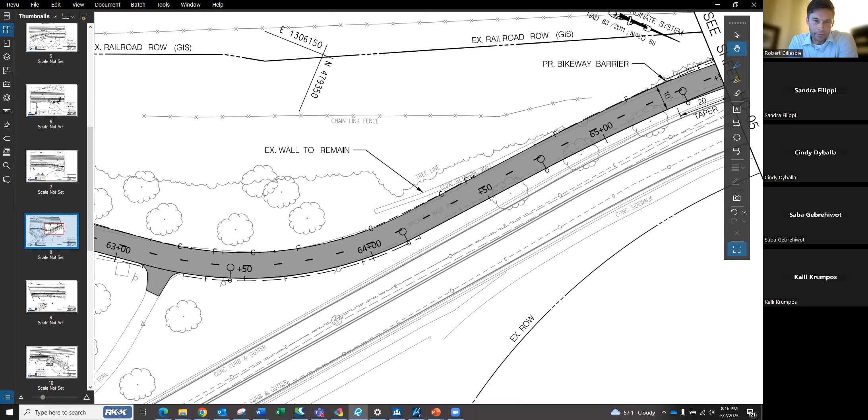I think the trade-off is clearly the street trees that border the road. If the city is amenable to eliminating some of those street trees, we can eat into that buffer and get that 12-foot effective width. Widening towards the WMATA property is more challenging, because we don't want to get into their right of way, or into that fence and retaining walls that abut their property. So it's easier to encroach on the road to get that path, but it's a balance between a 12-foot effective path and still providing a buffer between the road and the path. We can take another look and talk with the city about that. Thank you for pointing that out.

I saw some others chiming in too, supportive of the widest path possible, and I don't disagree with you. Certainly understand that. So thank you. Thank you, Mike.

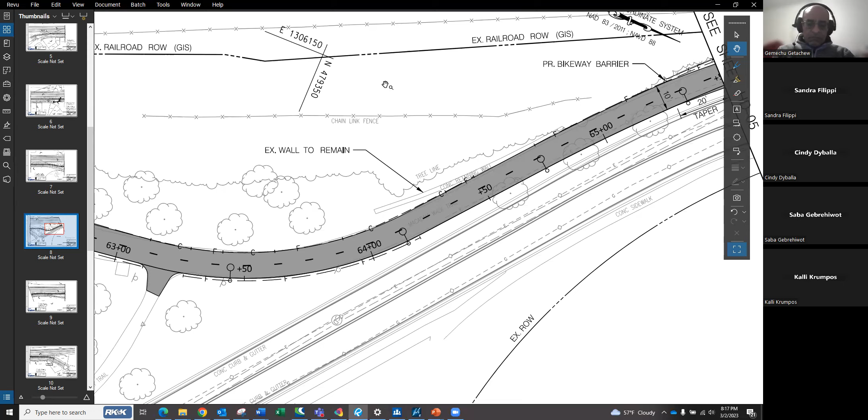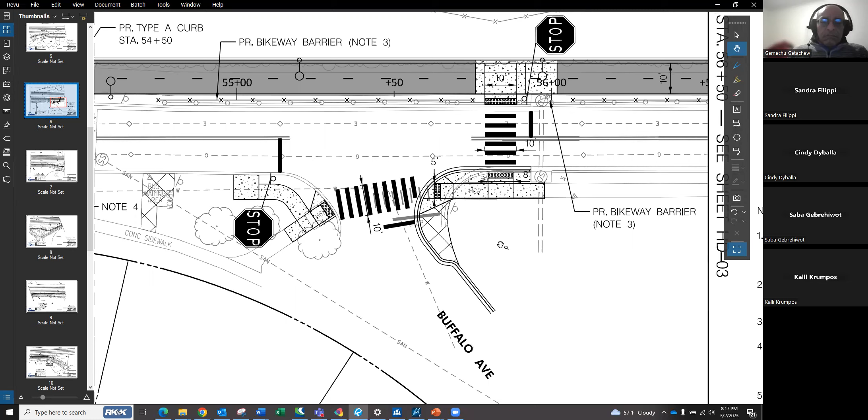The last question we have right now in the chat is from Ashley. You mentioned curb bump-outs to decrease pedestrian crossing distances. Would the bus stops be a good location for one of those, to provide even more space for the bus stop and the MBT to share? I think, Andrew, if I may jump in, the bump-outs mentioned were along Buffalo Avenue, where the existing proposed bump-outs are. But did your team look at whether there's any room to narrow Takoma Avenue at all, or is that infeasible?

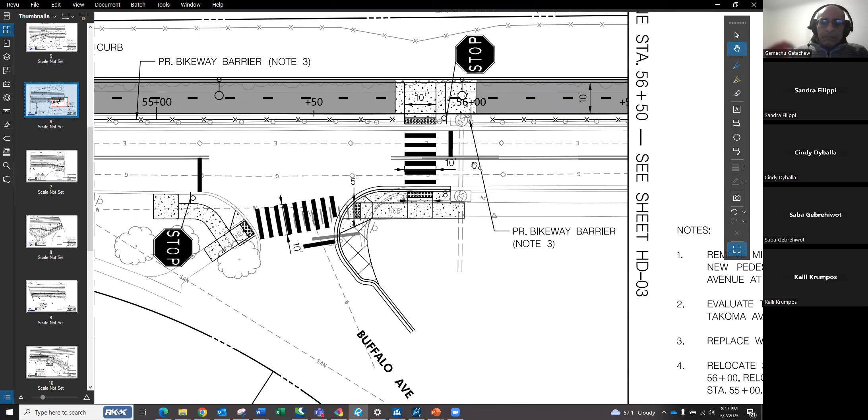I don't really think that narrowing Takoma is an option. We're measuring like 10-foot effective travel lanes, or even less than that. With the gutter pan, we're measuring about 10.5 feet. I don't think we want to go narrower. I'll let Rob chime in, but that's kind of where we stand with regards to narrowing Takoma Avenue. The bump-out is more for the crossing across Buffalo, and it goes into Buffalo. It doesn't impact Takoma as we're proposing it.

Yeah, I agree with that, Andrew. I don't think we want to go any less than 10-foot lanes through here. Consideration given to the bus traffic, even if it's very limited, is another factor, but 10 feet seems to be the narrowest we want to go on this type of roadway where there's bus traffic.

Thank you both, and thank you, Ashley, for the question.

We're about 12 minutes from the end of our evening. Are there other questions, comments, wishes, dreams that folks have about the Met Branch Trail?

We just got another note in the chat from Kalli, agreeing with calls for widening. She encourages us to plan for expected future use of the trail, especially once it's complete between Silver Spring and DC with connections to the Capital Crescent Trail. This could be even busier than current usage, which is a great point.